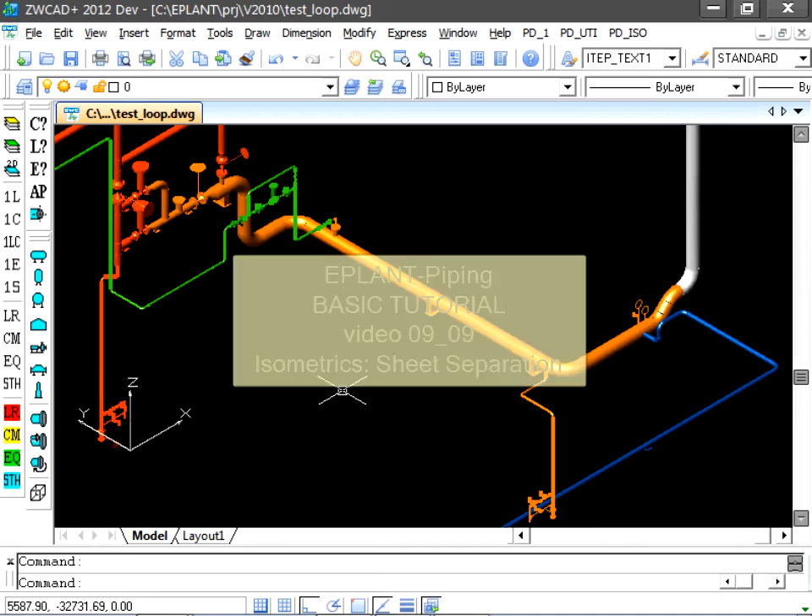EPLANT Piping Basic tutorial. This video shows how to separate an isometric in different sheets when it is too big for a single sheet. To begin with, let's check the connectivity of the line before extracting it. Although during the extraction a connectivity error would be informed if any, this specific command performs other verifications as well, and it is the basis for fixing any error.

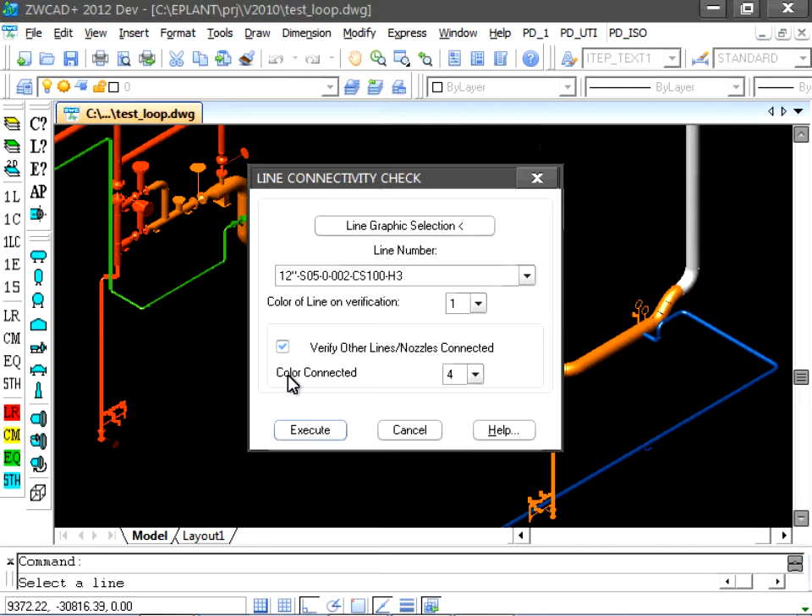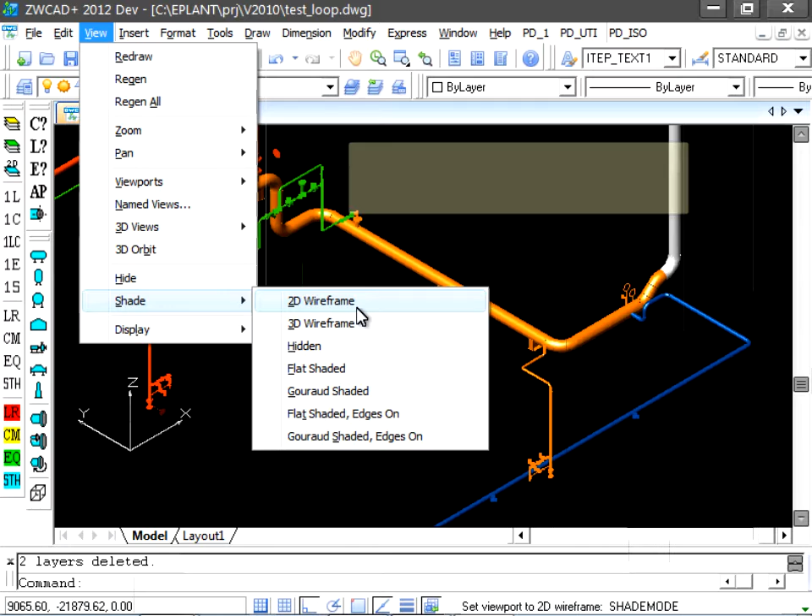We check also the option to look for the connection with other lines and equipments. The connectivity is correct and the line is currently connected with other lines in 6 different points. Before extracting the isometric, we are going to change the view from shaded to 2D wireframe. This alone will speed up the process by an order of magnitude.

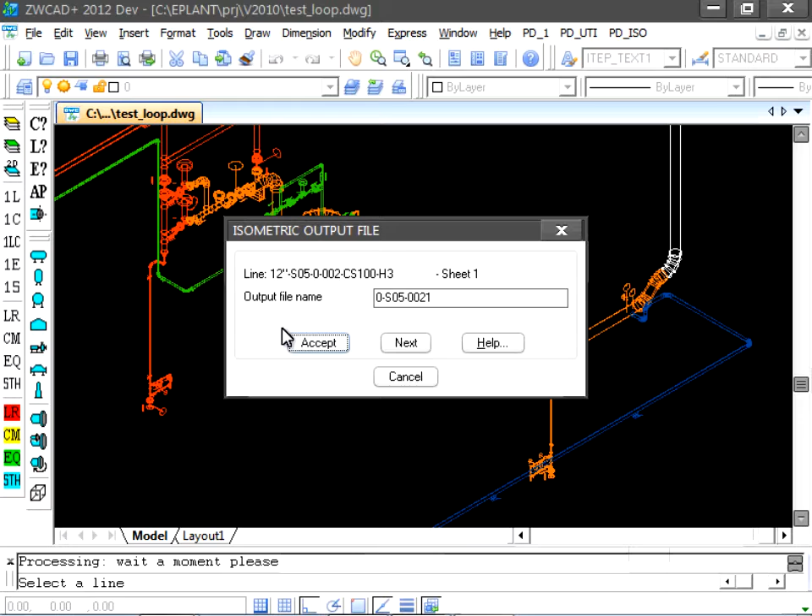We take at last the extraction command. Also for complicated lines, it is a matter of few seconds. This one is the output file. We open this isometric that was created in the project ISOE folder. We can easily see that the drawing will not fit in one sheet.

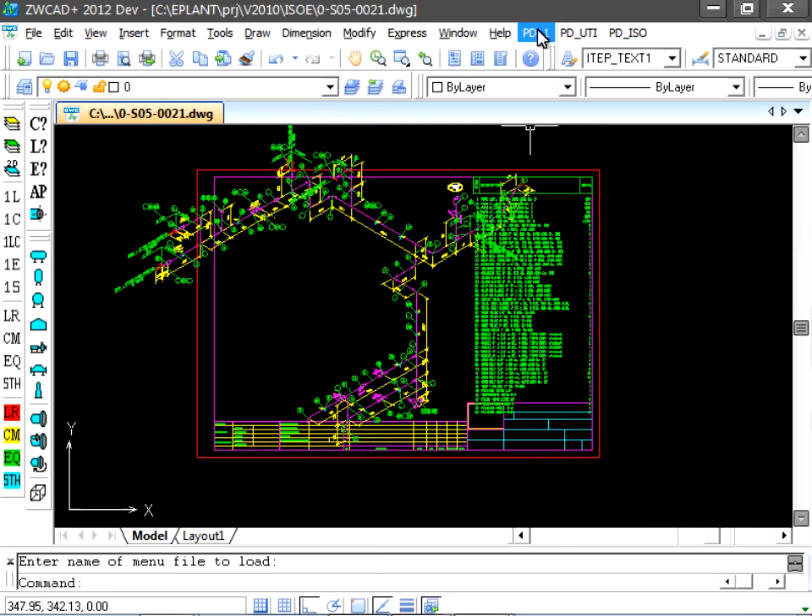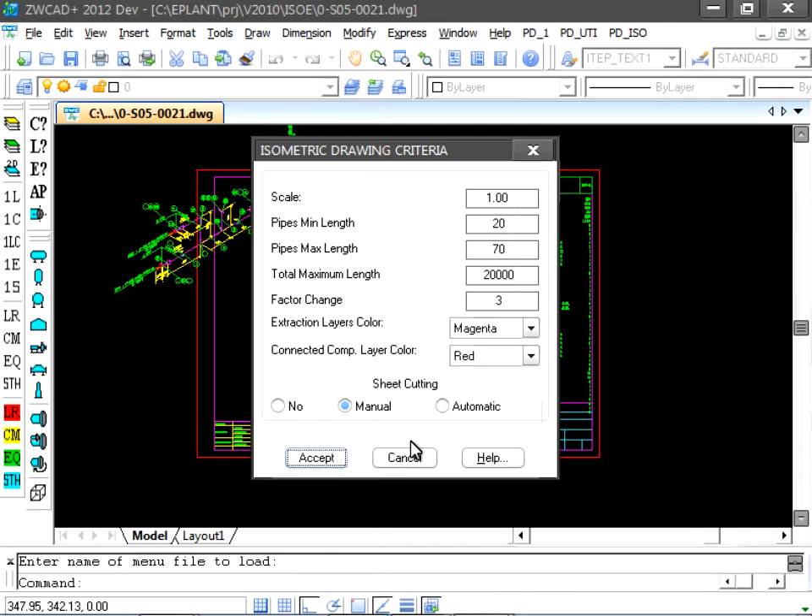Although there is an option to automatically separate the drawing in different sheets, respecting in each one the drawing area, it is better to manually control the separation to avoid arbitrary separations. With the manual setting, the separation is performed whenever an isometric cutting symbol is found along the piping line. In any case, the drawing is always centered in the drawing area.

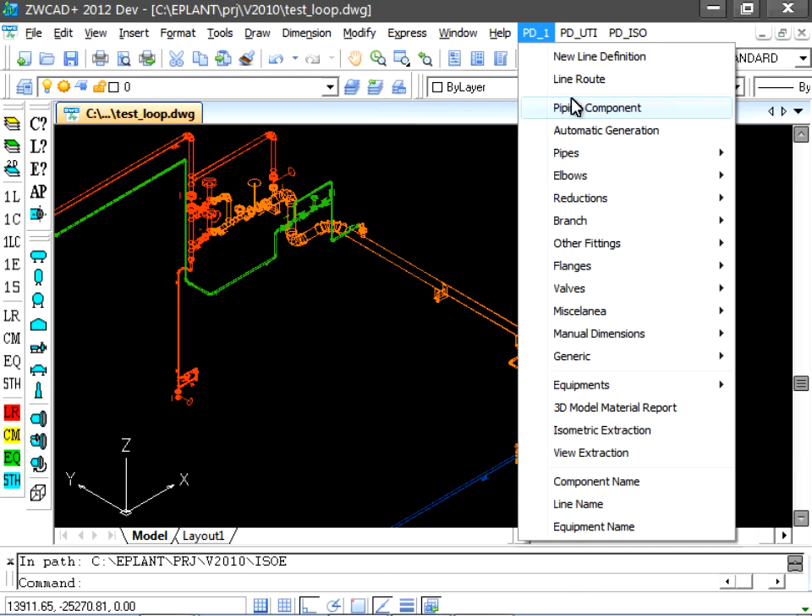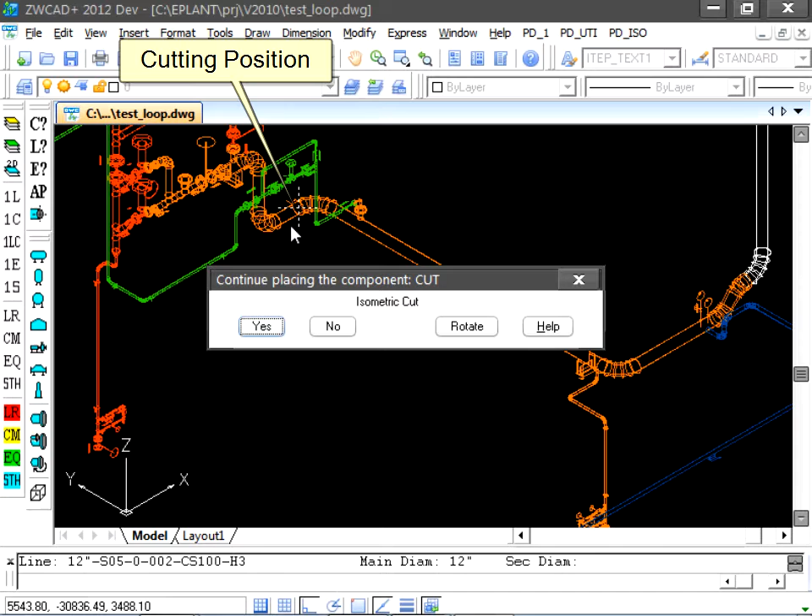Let's come back to the 3D model to place these separation symbols. This symbol can be placed using the general command where all the defined components can be selected. We are going to cut the sheet in this elbow. And also here before this elbow. Selecting the component just placed, we can verify that it is the cutting symbol.

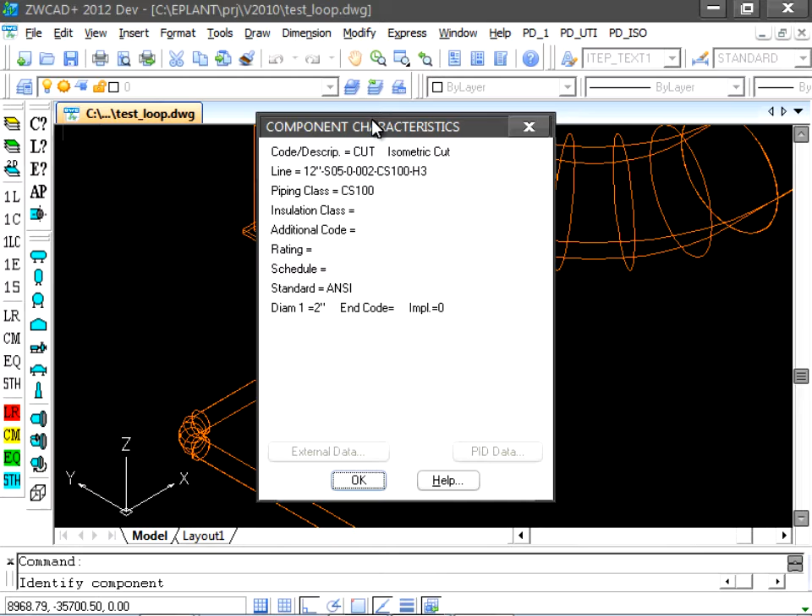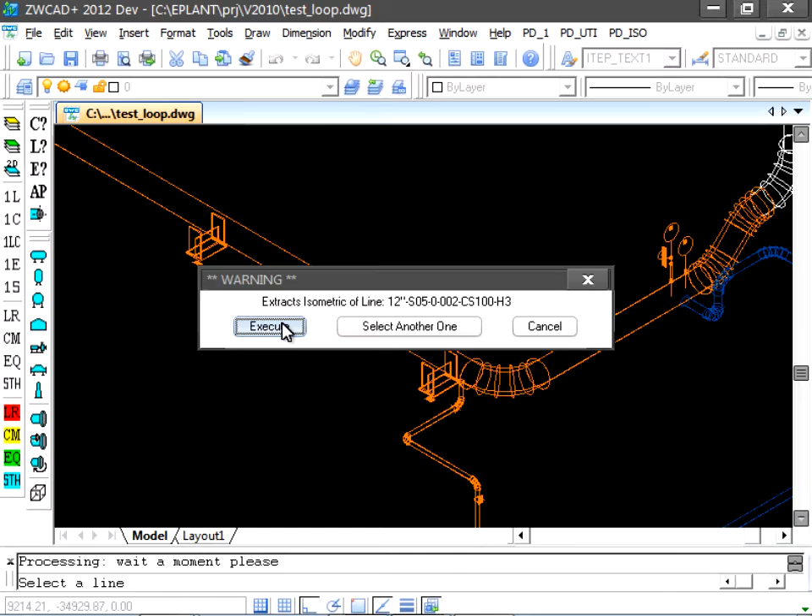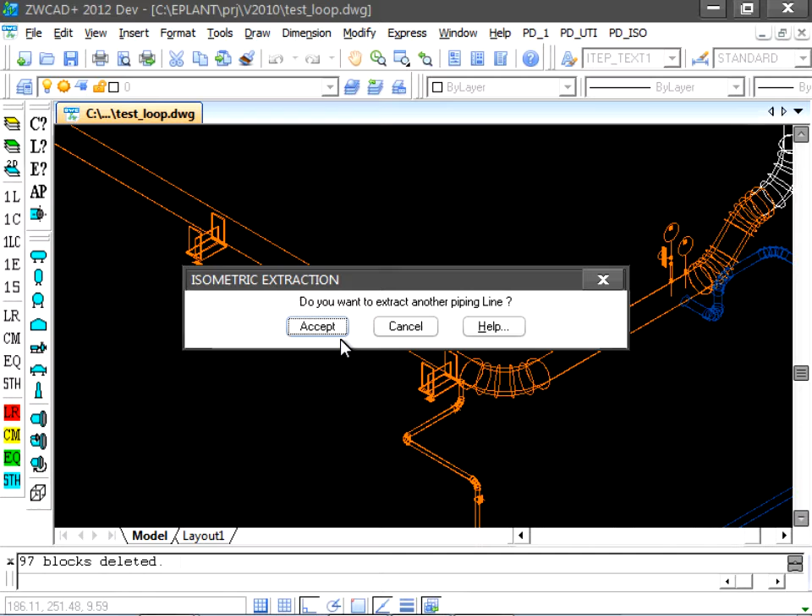We extract the isometric again. We can check the separation mode that is set as manual. And we extract the isometric once again. This one is the first sheet. This one is the second sheet. And this one is the last one. Let's open all these sheets in sequence, starting from the first one.

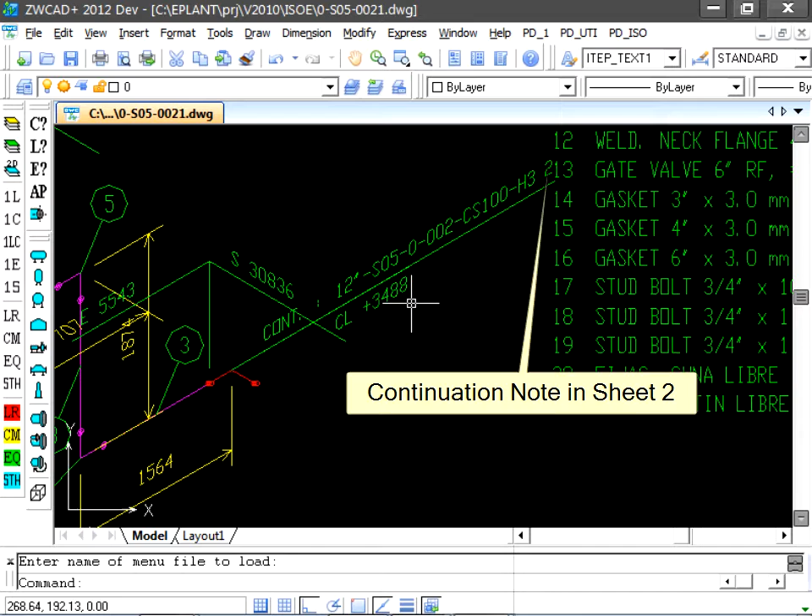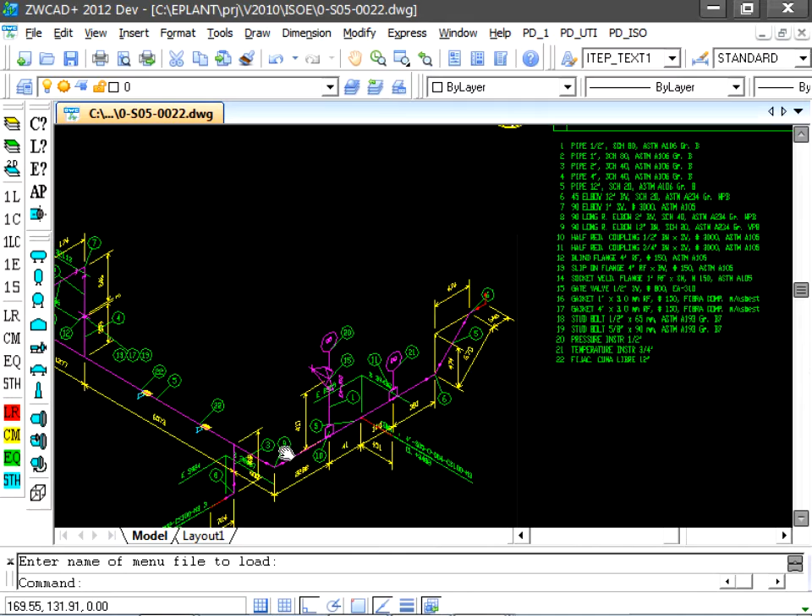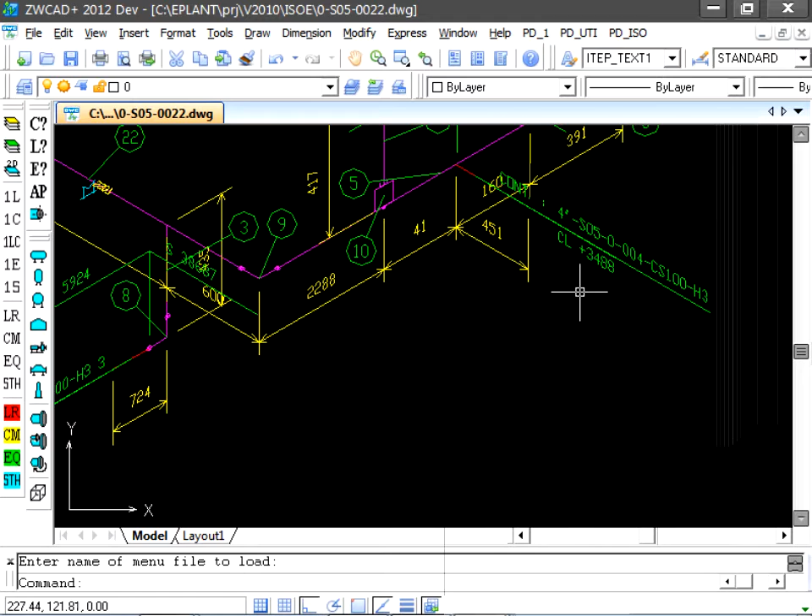We see here the continuation note in the second sheet. We open the second sheet. We see here the continuation note in the first sheet. And here the continuation note in the third sheet. Here the continuation note in another line.

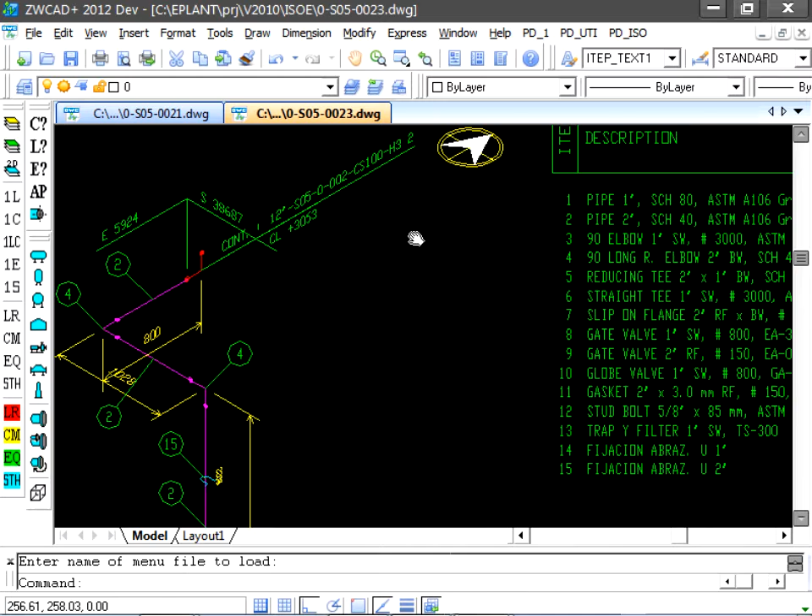We open now the third sheet. This one is the continuation note in the second sheet. We can appreciate that the drawing of the valve panel at the bottom is confused. To fix this problem, we may proceed like this. First, we delete everything but the line itself. We can see that this point is not connected with this one.

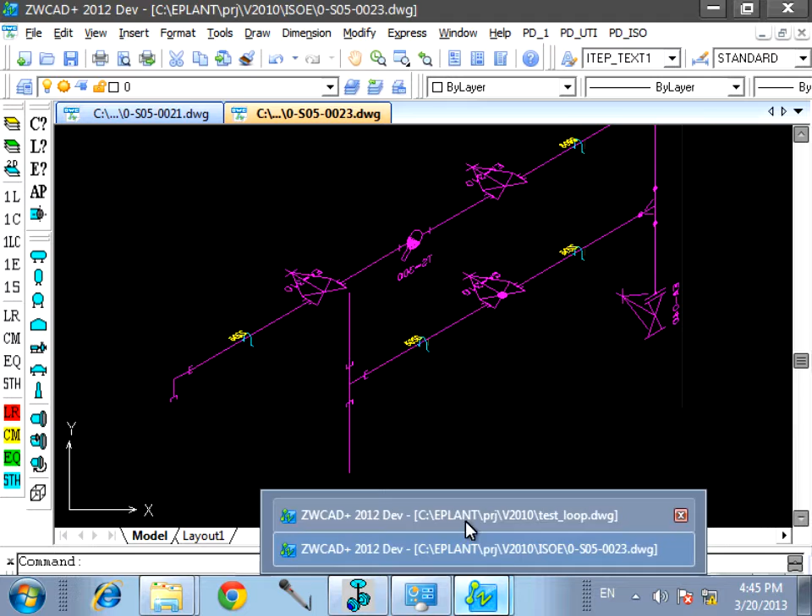Let's see the original geometry in the 3D model. It is a valve panel that creates a closed loop. As the drawing rule only imposes a distortion over the length of the pipe segments, the isometric of a valve panel will generally result open in some point. We can easily fix this with the closed loop command.

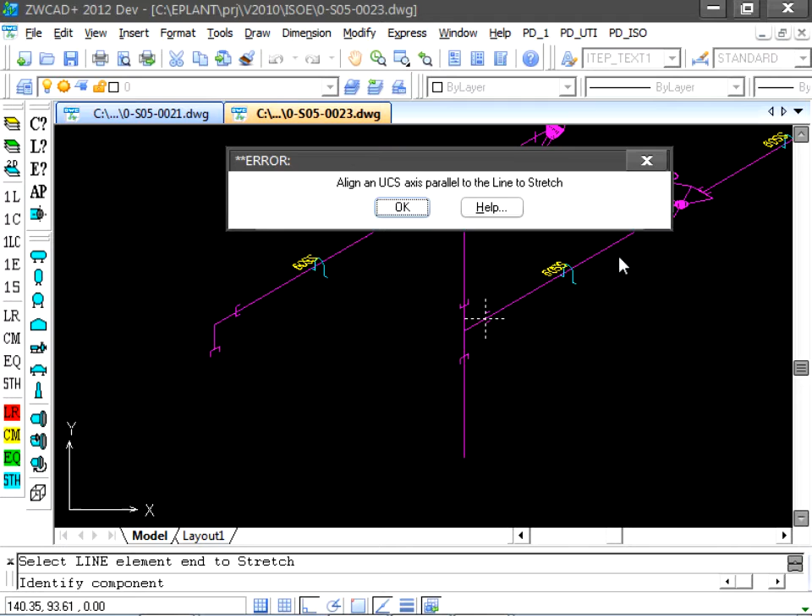This command prompts to select the elements that we are going to move, in this case the T and the two vertical pipes. Next, we have to select the line end that will be stretched, but we are warned that we need to align the line to stretch with an axis of the coordinate system. We can use the UCS command to this purpose. We have now the local x-axis parallel to the pipe to be stretched.

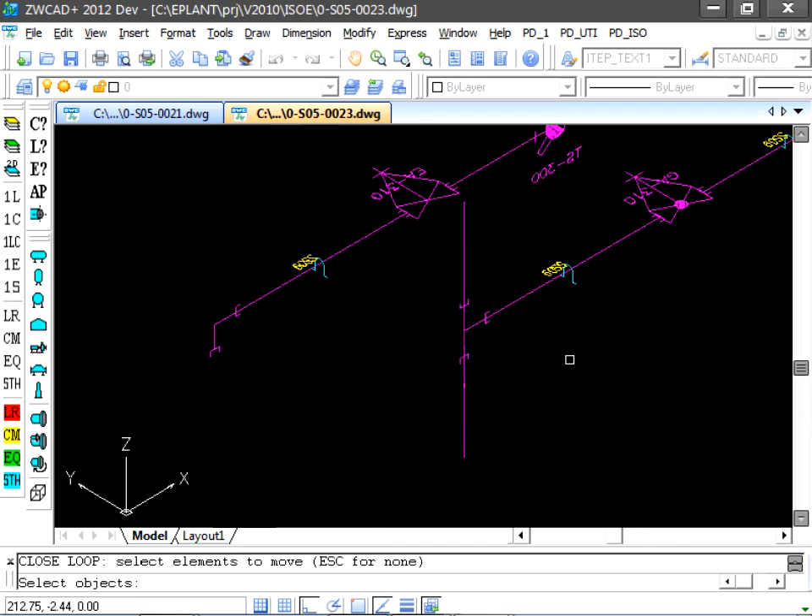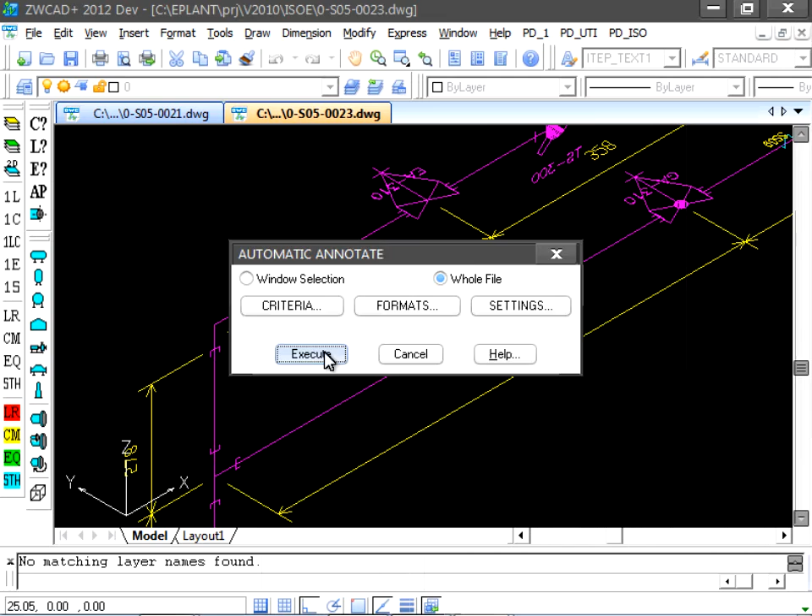We select the point to stretch, and next the base point to move. And last, the second point, that is where the base point must be connected, and the command closes the loop. We are now in the position to regenerate dimensions, nodes, and the MTO. And in this way the drawing is finished.

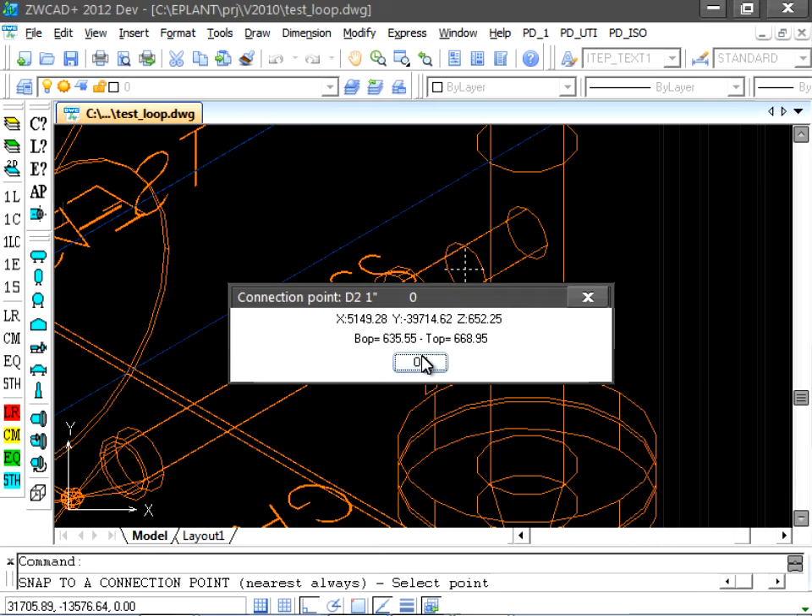Given that the opening point of a closed loop can be anywhere, and this may create a confused drawing, it is better to cause this cut in a convenient location to simplify the fixing. A convenient location is to disconnect the pipe on the side where the panel has less components, for example this point.

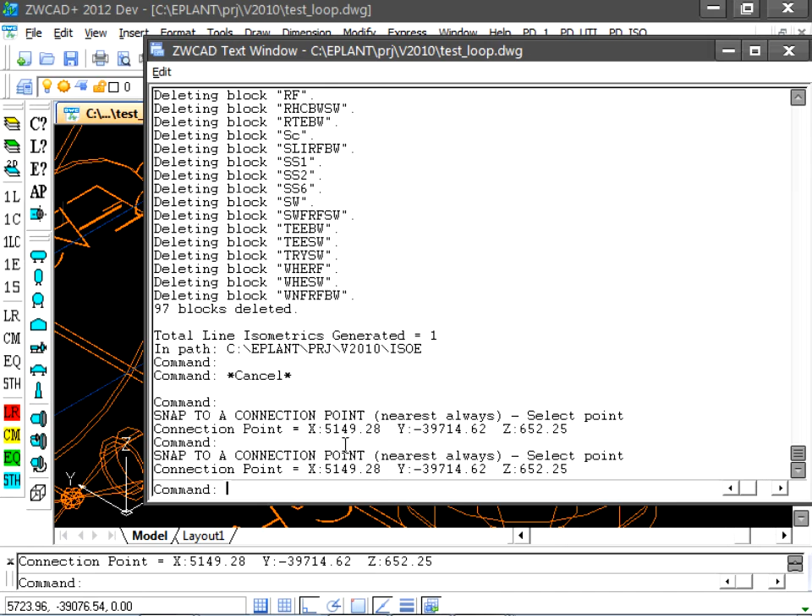What we are seeing here is the coincidence between connection points of adjacent components, that is, the very mechanism used to connect components. Therefore, to disconnect the given joint, it is enough to change one of the connecting points by 1/100th of a millimeter. We select the pipe and will change the coordinate of one end, in this case the D1 end that connects to the T. In this case, any end will do the same.

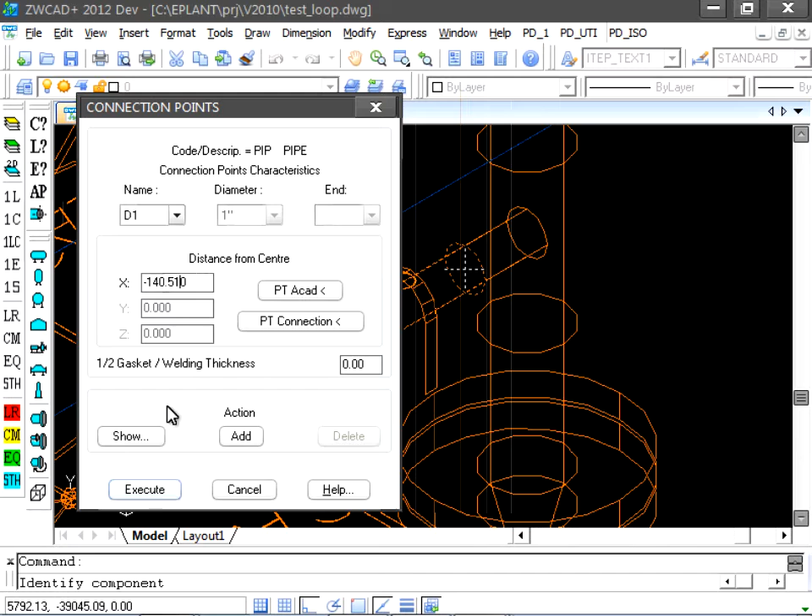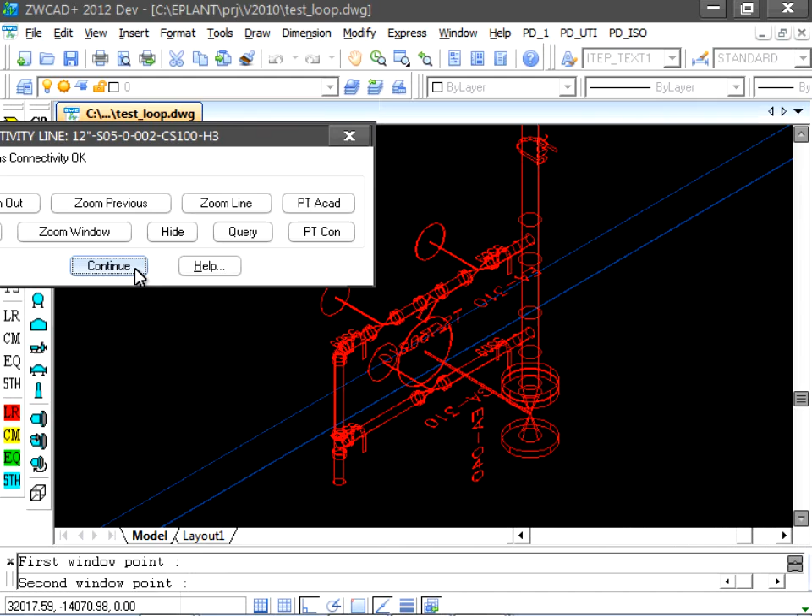The pipe is not connected to the T anymore, but the connectivity is maintained all the same, as we can see. This is so because both branches are connected. We can extract again the isometric and see what's happened.

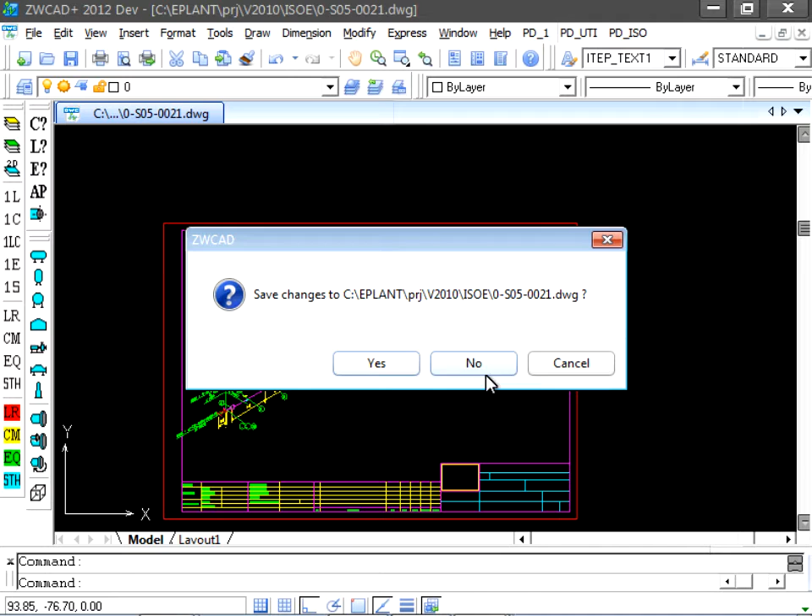This one is the first sheet, but we cannot save it because we forgot the previous session open. Let's close all the sheets to avoid this problem. Opening the third sheet, we can see that the panel is now open in the position we chose. We delete all nodes.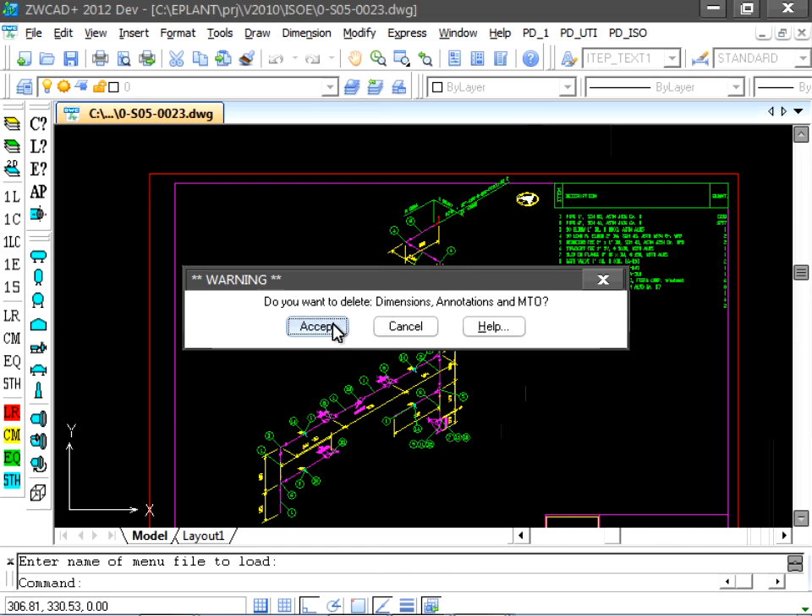In this case, the disconnection is easier than the previous one. It could be fixed using the cut stretch command alone. But let's use the Close Loop command once again. With escape, we say that there are no components to move. We fail again to properly orient the UCS.

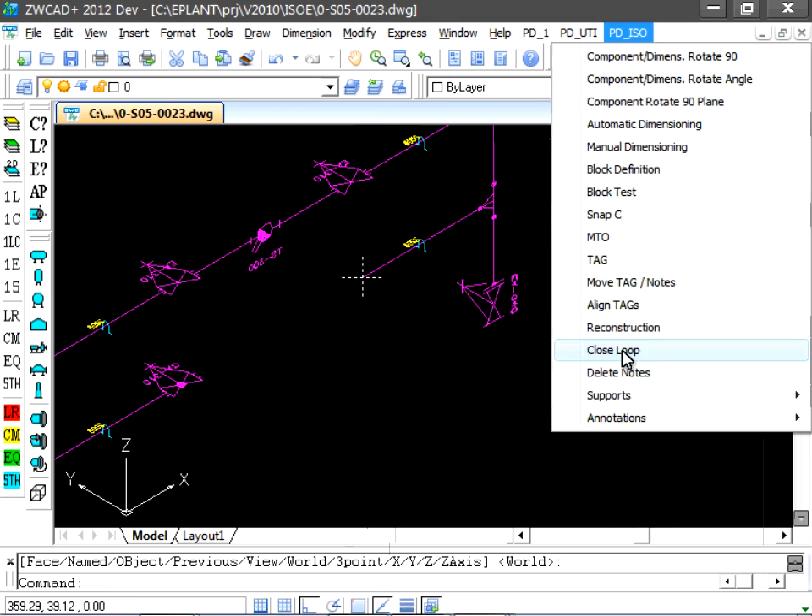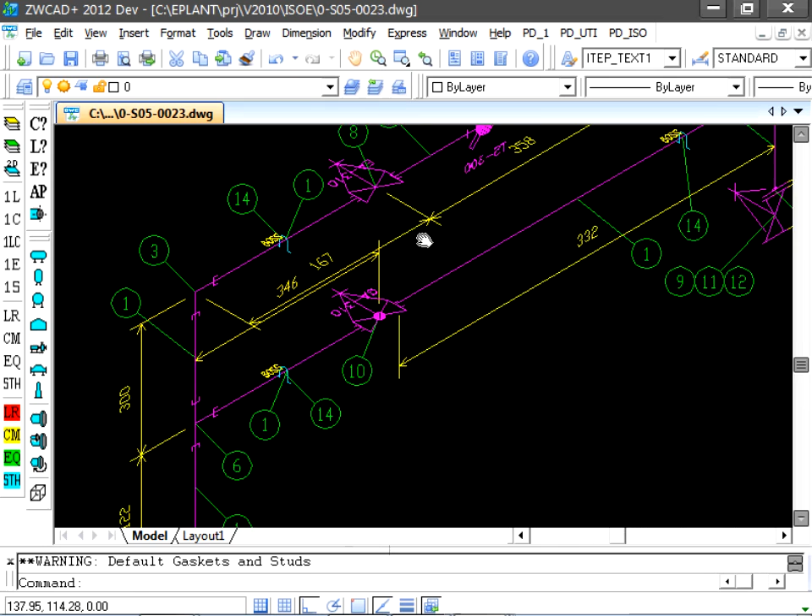First, select the end of the line to stretch. Next, the base point, which in this case is the same as the previous point, and the second one that closes the loop. At this point, all the nodes can be rebuilt. We have here a dimension pointing upwards and creating a little confusion. We can rotate it around the axis with the same command that rotates the symbols. We could rotate it another 90 degrees to place it vertical.